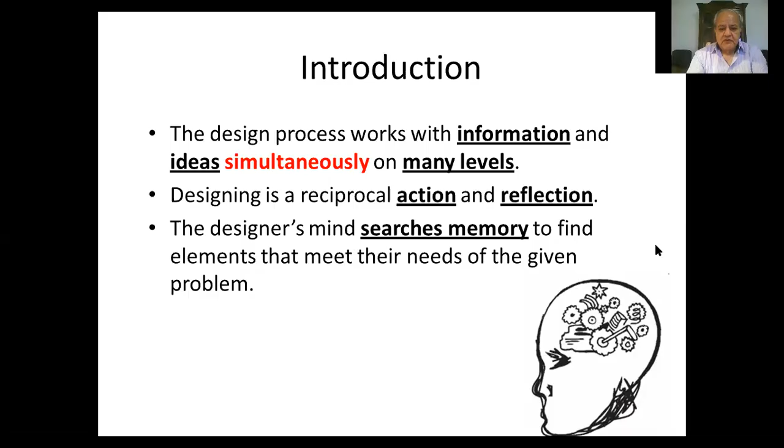So while we are working on the conceptual stage, it's like a puzzle. We never know what the building will look like or the idea will look like at the end. It's pieces of a puzzle that we try to put together and try to find what brings them all together in a meaningful way. How do they fit together? What are the missing pieces?

Do we have missing information about the site? We have missing information about the program. We have missing information about the client. If there are missing pieces, you will never get the full picture as you like to have at the end. As I said, we go through different stages of design, and during the stage of the synthesis, this is where

ideas are formulated. So the first thing is that we collect information about the site, the program, the data, examples, and then we go to analysis stage where we analyze this information and find out what will impact the project most and identify what are the objectives that we want to achieve. And then the synthesis stage, where all this information comes together in the form of the concept.

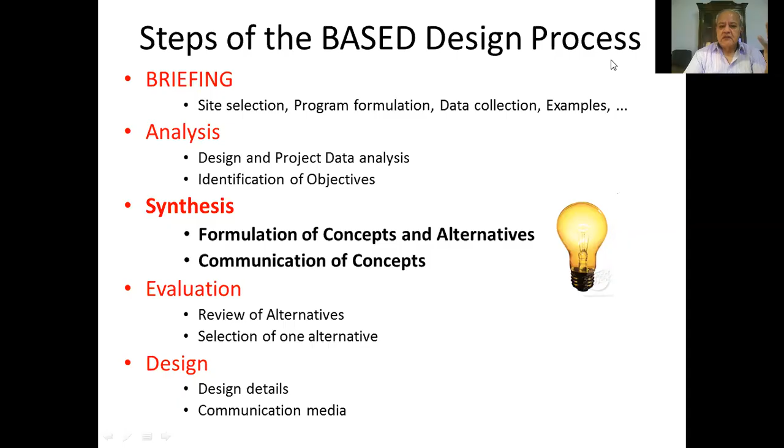But the key element in our work is synthesis. If we take the first letters of each of these stages, we'll find that they create the word BASED. So we can think about this as a BASED design process. BASED: briefing, analysis, synthesis, evaluation, and design.

So the BASED design method that we talk about starts with a briefing of collecting information about everything, and analysis, synthesis, evaluation. As we said before, we analyze the program, the site, the goals, the alternatives, and then we go to the synthesis stage, where we develop solutions and concept, form, and space, and provide that in a preliminary or schematic design. You can use models, of course, to illustrate your ideas. You can use some renderings and so forth.

And evaluation of these concepts to achieve the design. So analysis, synthesis, evaluation. If successful, you go to design. If not successful and none of the alternatives satisfies the client and the users and the needs, then you go back to the analysis stage. What is missing? What do we need to do more, and how to improve our base knowledge so that the synthesis is better and complete.

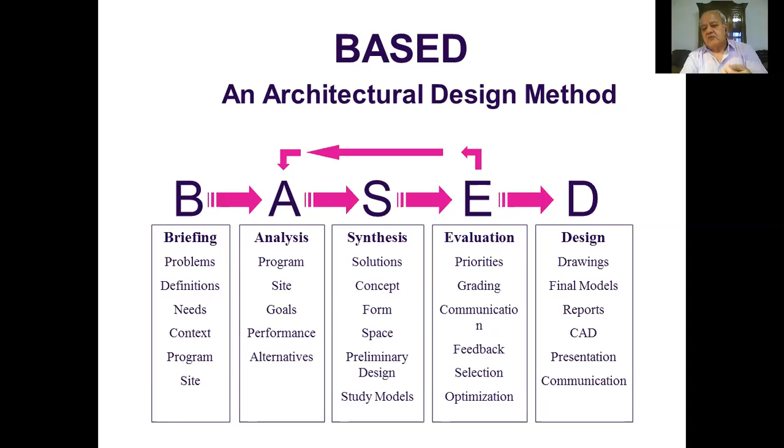So it's not a one-shot process. It's, as we said, action and reflection, until we reach a satisfying concept. Then we proceed to the design stage.

Concepts can come from different sources, unlimited. They can come from ideas of balance, if you are designing a courthouse, for example, or a governmental building or something. So the ideas of balance are represented in symmetry, nature, tools, ratios, level, justice, and can be a source of ideas for your concept. If you want to illustrate grace, maybe you look for how the dancing happens, flight, skills,

fluidity, focus, effort. If you are looking for complexity, you can look at integrated circuits of a computer chip. You can look at politics, ecosystems, planetary movements, fractals, music. If you are trying to illustrate knowledge: through learning, experience, crafts, skills, communication, memory, mastery.

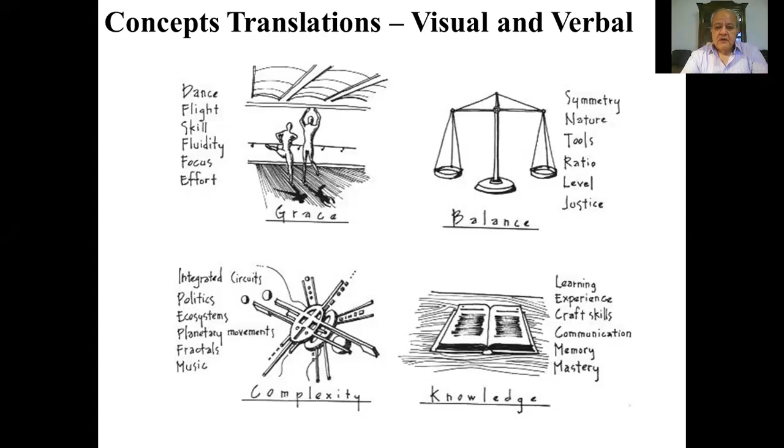So ideas can come from unlimited sources. And of course they must be related to your client interests, your site, your ambitions, dreams that you are translating for the client. So the ideas can be intangible, can be something that is very conceptual, very highly conceptual, as we said, ideas, human conditions. They can be tangible, coming from a certain object, and they can be combined and coming from different sources.

Can you hear me? Yes, doctor. I lost you for a second, but you're back now. Buffered, but it's working. Yes, yes. There was a phone call, so it interrupted the speech.

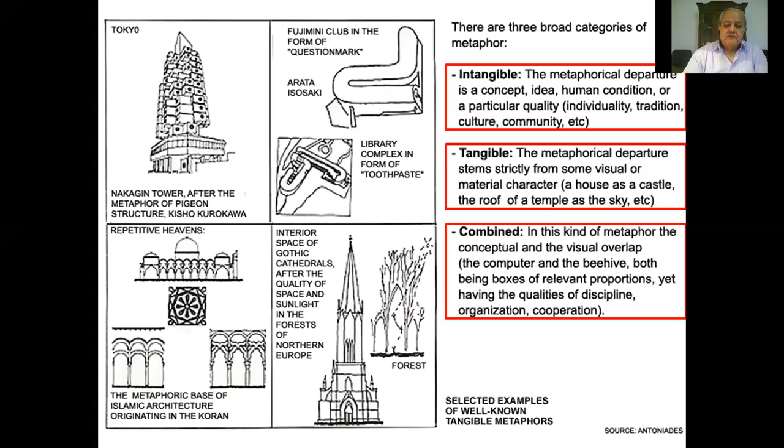So as we said, the ideas can be coming from a very intangible level, and they can be coming from very tangible, like imitating a certain shape or form or whatever, or a combination between the two. So you have to open your mind to everything. Try to find ideas from as many sources as you can, and sketching.

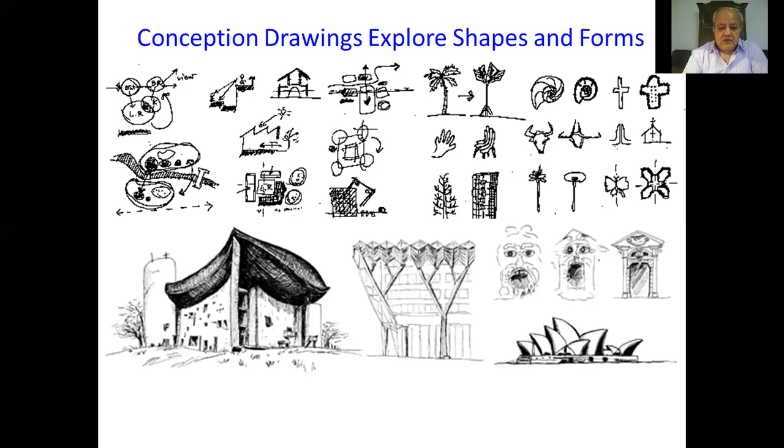The success of concept creation is sketching. If you have good sketching skills, this is very valuable at this stage, to keep sketching your ideas. Most successful projects were coming from sketches. Also, having a mood board is important. Collect some pictures, images, materials, so that you can provide this as inspiration for your client.

As we discussed yesterday, the site can be the main source of your concept, depending on the topography, climatic condition, geography, demographic conditions, geology, and many elements that can be the main source of the concept. So your investment of time in the site analysis and site survey and information collection is very critical. Your idea might come only from the site, to relate it to a certain cultural background or buildings around you or whatever.

So you have to weigh each determinant and see what is the strongest. Is it the site? Is it the program? Is it a philosophical idea? Is it an intention? Is it the artist's work, him or herself? So there are many sources. So the site itself, the site conditions, the topography can be a very important determinant in creating the concept.

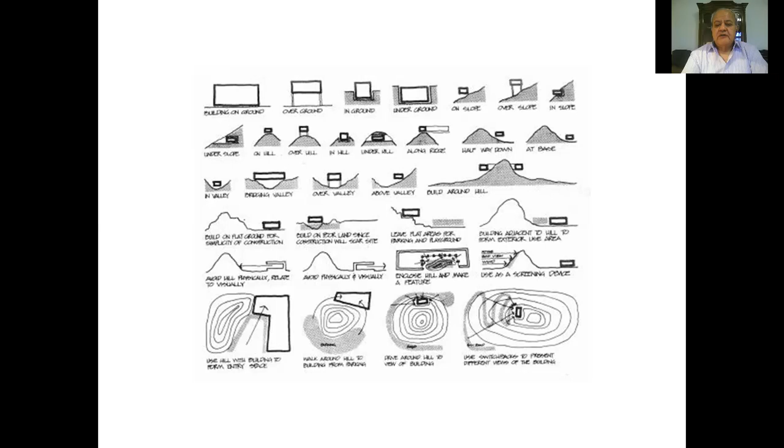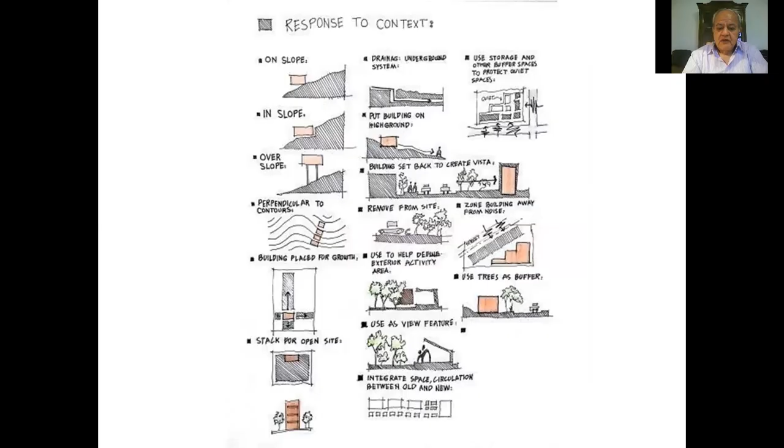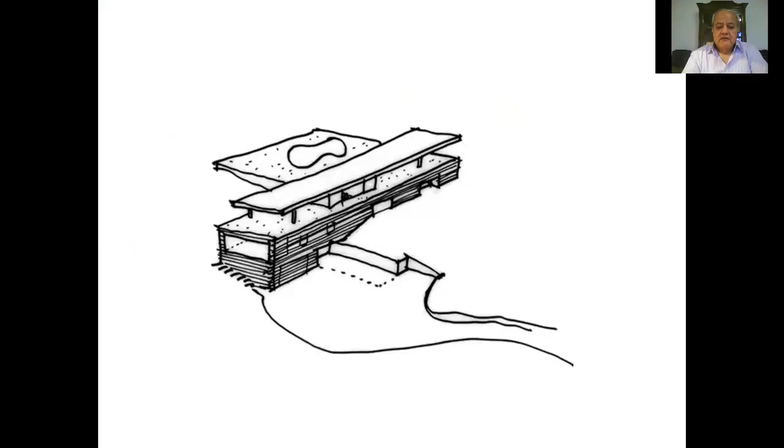How do you respond to the site conditions, the contour lines? Are you going to build on the slope, in the slope, inside the slope, or over the slope? Do you have vegetation around? How are you going to deal with that? So the site itself and its conditions can be the main source of the main concept generation. So your integration with the site: if you have excellent views around, maybe you need to have your project open to the nature around you and integrated with the topographic conditions.

So the influences on the design can come from different sources. And you have to treat each project separately. Every project situation is different, has different requirements, different limitations based on the client, the budget, the program, the cultural, environmental, technological, aesthetic context. Every project must be treated individually, not copied from other projects. So you have different challenges and opportunities.

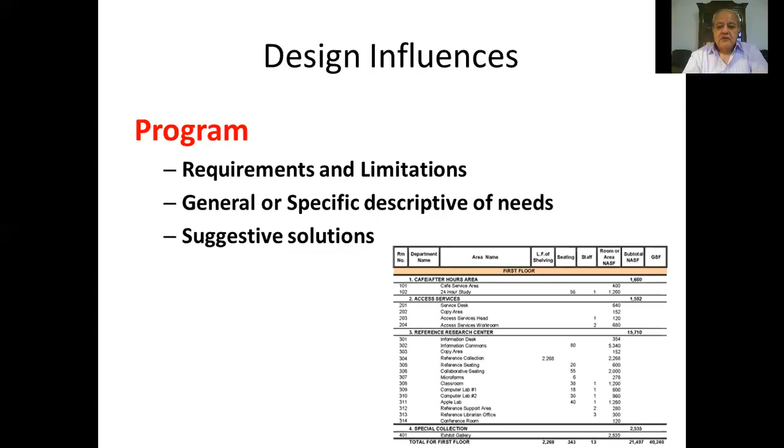The program can be a very important influence on the design. What are the requirements, the limitations, the areas? Do you need long span structures? Do you need high-rise structures? They can provide you with solutions directly from the program requirement. If there is a strong community around the project with specific requirements, you need to have meetings with the community itself. Community leaders, focus groups can provide you with important information and activities.

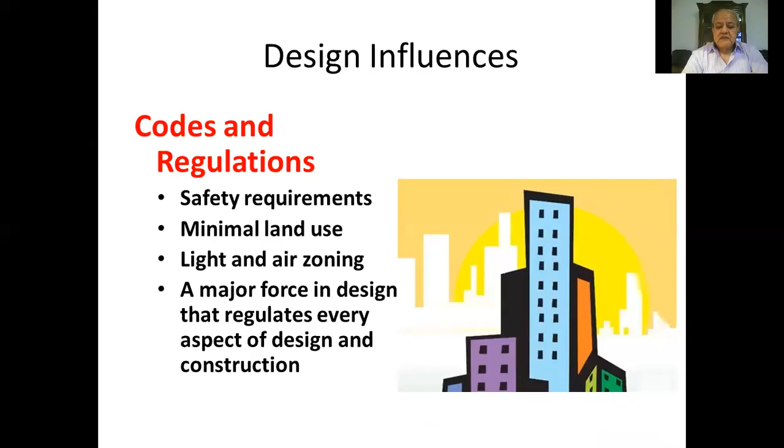Codes and regulations, of course, have major influence on the design. What is the allowed area for construction? How many floors? Setbacks? FAR, how many square meters can I build on this site? Parking requirements. All these will have major influence on the design.

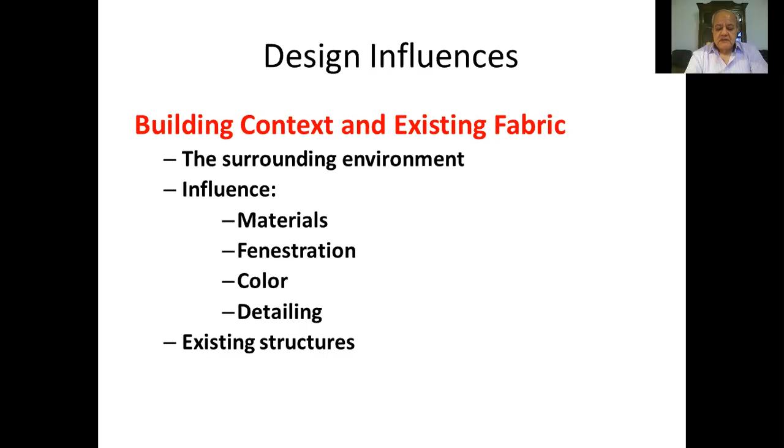Where is the building located? You need to understand what is the existing fabric around the building. What kind of buildings? Traditional, modern. How do you relate to them? Are you going to integrate with them so you do something similar, or make something different? And why? You always have to think about why do you want to do this. So this will have influence on your selection of materials, fenestration, color, details, and so forth. So you have to understand the context.

As I said, site and climate are important considerations. The site has its physical characteristics, and the climate: wind direction, solar orientation, temperature, humidity, precipitation, and how do you deal with these climatic conditions? Do you have snow? Do you have rain? Do you have sand?

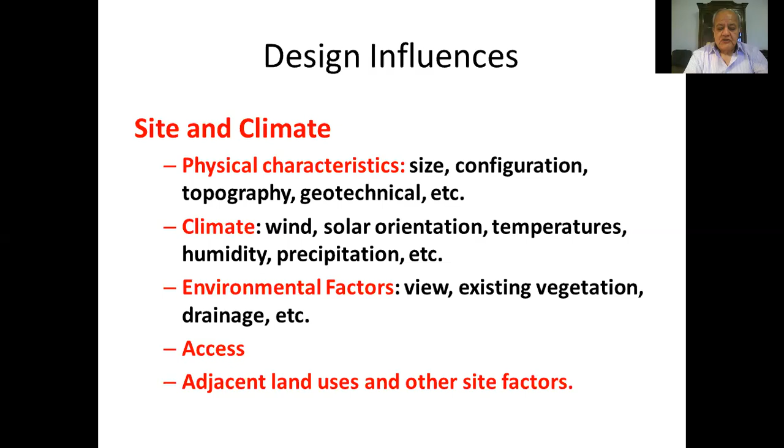The second item are the environmental factors. What are the views around you? Which direction? Do you have existing buildings or existing vegetation? How do you reach the site? What is the access to the site? Adjacent land uses. Many items coming from the site.

Building technology is also a critical factor, because now buildings are not only walls, floors, and ceilings. They are like small machines. We have air conditioning, we have lighting, we have internet, we have different systems that are impacting our building design from the beginning. And these are identified usually in the beginning of the project, in the briefing stage.

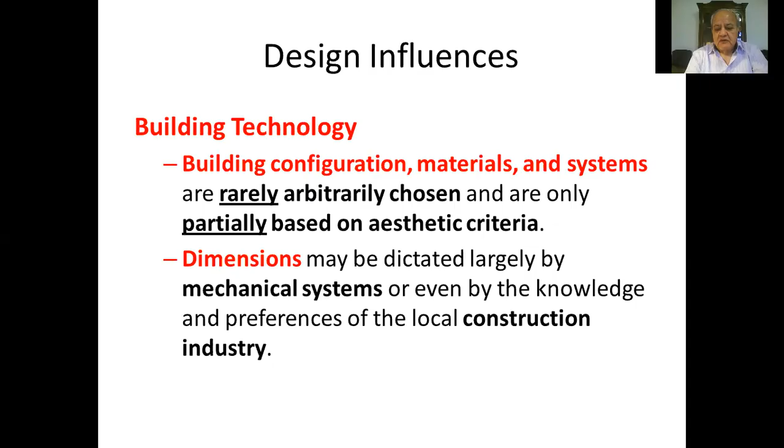The client might tell you about specific requirements. If you are designing a factory or a hospital or an airport, you have to consider all these building systems from the beginning of the project. Dimensions might be affected by the mechanical systems used, the construction systems required. Maybe the client wants to use prefabrication. Maybe the client wants to use standardized elements so that they reduce the cost. So you have to be careful about this.

Of course, the issues of sustainability, as we say, the 3 E's, environment, economy, and equity, are becoming major elements in the design now. And currently we can also add to it health, because health is becoming a major concern in any design, and that will impact the design industry in the future a lot. So you have to think about all these aspects of sustainability, and maybe the client will ask you to design the building from the beginning to achieve a certain sustainability grade, like platinum, gold, silver, or stars, or whatever. So you have to consider that from the beginning.

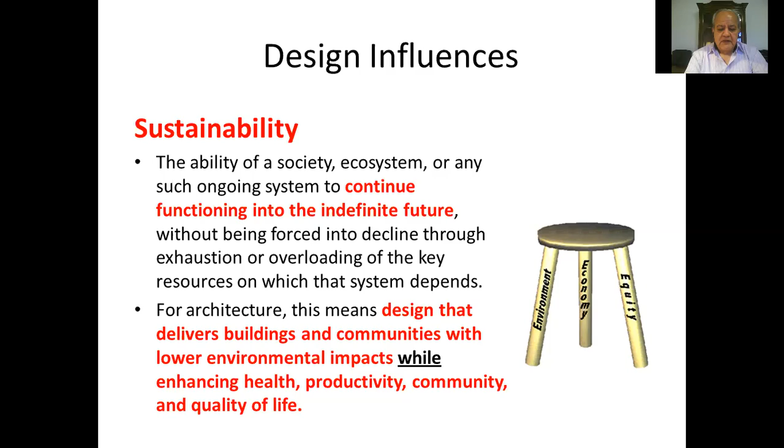Cost. Of course, in university, you don't think much about the cost. It's taken for granted, and you don't have to worry. But when you go to professional practice, you will find that cost comes sometimes the first item in the project. We have limited budget. Please reduce the cost. Don't make it cost too much. You will hear that a lot from your clients. So cost considerations are very important. You have to understand, does the client have a fixed budget or flexible, not open? No one has open budget. It's either fixed or flexible. So you can go up and down a little bit in the budget.

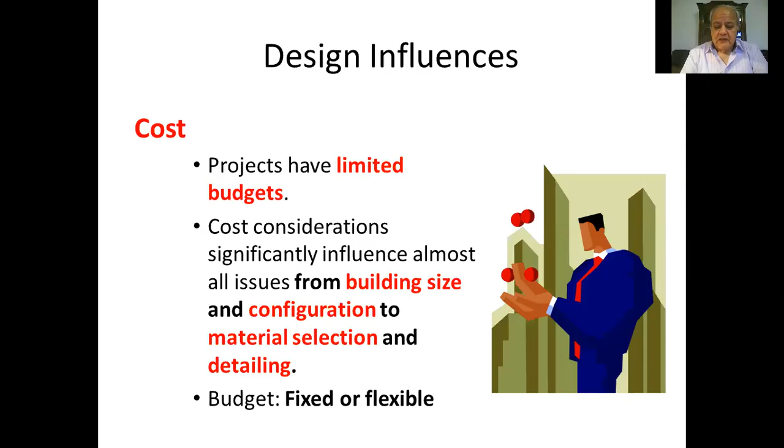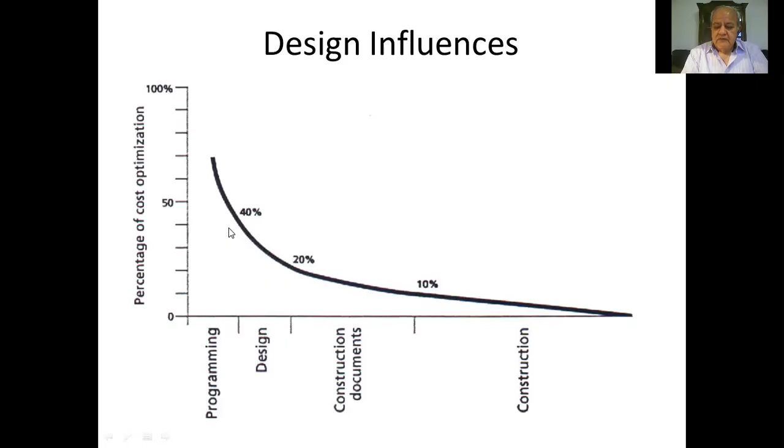Again, we want to stress that what you do in the beginning of the project impacts the cost a lot. You can optimize the cost of the project in the beginning during the programming and the design stage more than at the end in the construction stage. So make sure that you spend enough time here, and the client should understand that the time spent at this stage is to optimize, not reduce. Don't use the word reduce. Use the word optimize the cost. There is always a cost. And we don't want to associate cost reduction with quality reduction. No, we want to optimize. We want to use the resources and the cost in a meaningful way so that we achieve the best results.

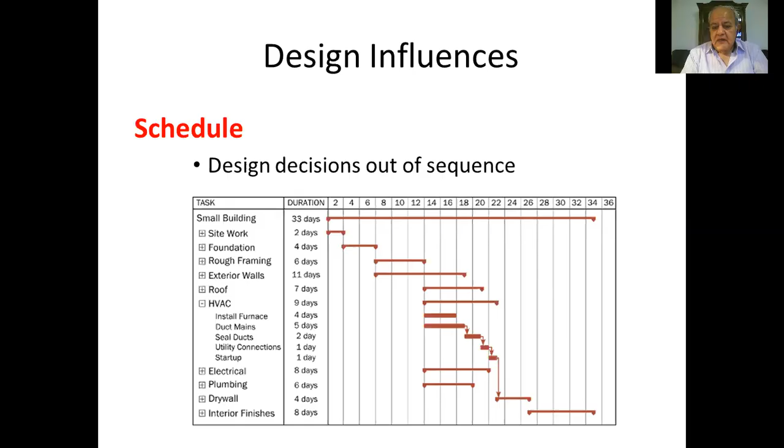Schedule. Sometimes you have a client who wants to build a school. So they want to start in a certain date, so that they furnish the school and start with the academic year. So you need to understand from the beginning, how will the schedule affect your design? When to start, what to do when, and so forth.

The client is always a major influence of the design. In professional practice, you always have to be communicating with the client. Don't disappear for 2 or 3 months and then come up with a good idea. It doesn't work. You have to be continuously meeting with the client during the design stage. Review your ideas. Make sure that you are on the right direction. Make sure that they understand the consequences of any design decision in terms of cost, in terms of time, in terms of complexity, and so forth.

There is no good client. Some clients might come to you with a program and budget and all the objectives of the project, and they want you to just design. Others, they have no idea what to do. They might have budget, but they don't know what to do with it. So you need to find site and program for them and objectives. So there are different types of clients, and you have to meet the client several times in the beginning to understand what is the nature of this client and how can you work together to achieve the best results.

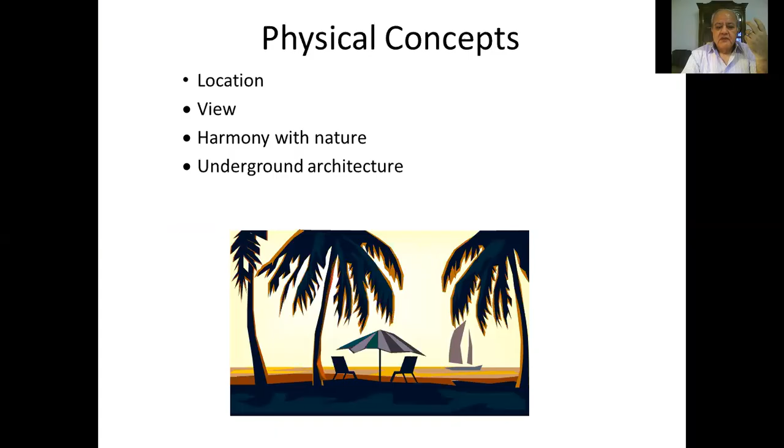How do we relate to the natural elements, to the views, to the architecture that is already there? Of course, there are many well-known sources of concepts from nature, from beehives, from seashells, from the sand dunes, from waves. All these are kinds of sources that are coming from nature. They can also be cultural. If you are designing in a historical site or traditional site, you have to consider all these elements.

Religious factors. If it's a religious building and has some significance, you need to think about the religious factors, the social factors, people who will be living in that area. Economic factors. What is the economic standard for the project? Is it a shopping center, high class or middle or low? How do you design for each one of them? Political factors. What kind of political statements need to be illustrated in the project?

Functional factors. You might have different functions. They have complex relationships, and you need to think about them. Spatial relationships also might be a source of the concept. What kind of spaces do you have? How do they relate to each other? How do you connect them together? Same level, or use different staircases and different elevations, different heights. Do you have the same height for all elements? Are they all 3 or 4 meters, or do you have areas that require 6 or 12 meters? So how do you bring them together?

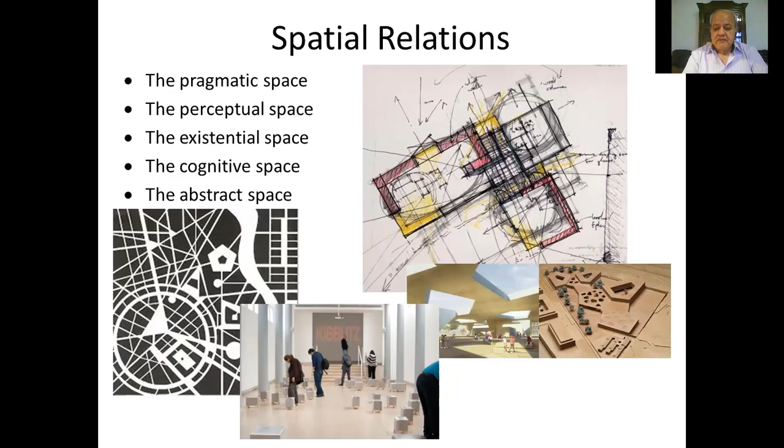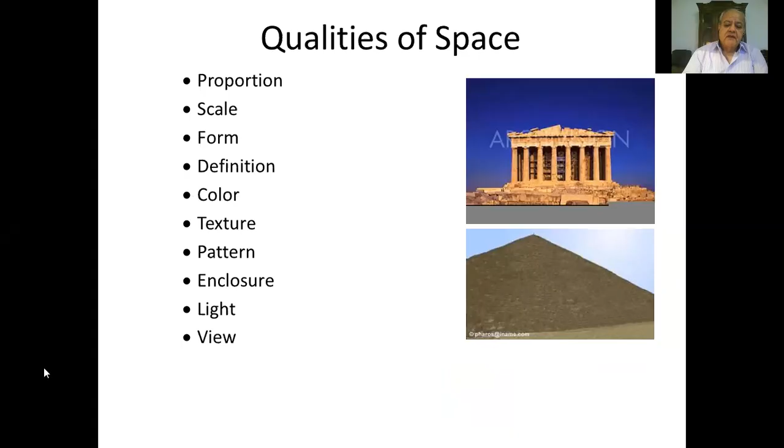We have different types of spaces. There is the pragmatic space, the physical space, there is the perceptual space. How will people perceive the space and walk through the different spaces? Existential space, cognitive space, abstract space. So all these are different ideas coming from the spatial arrangement. Of course, the space has qualities related to its proportion, width, length, and height, scale, big or small, form, definition of the space, the color, the texture. All these elements affect the quality of the space.

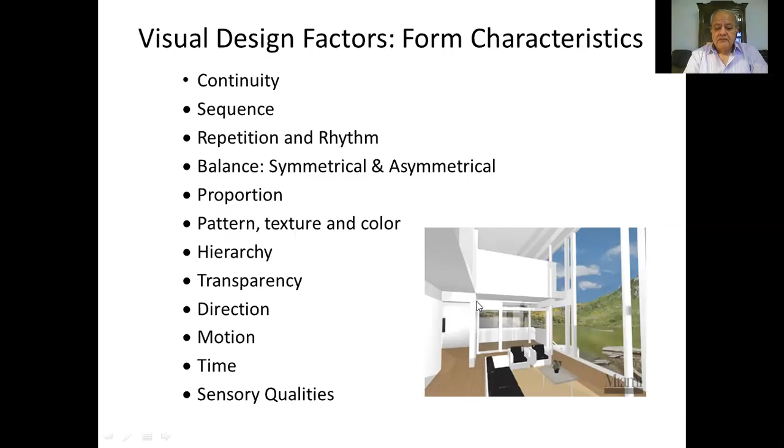The visual design factors. How do you put these spaces together? What is the sequence of the spaces? How do you provide continuity and fluidity between the spaces? Are they symmetrical, asymmetrical? Their proportion, are they all the same proportion or have different proportions? Pattern, texture, color of spaces, hierarchy, transparency, direction, motion, time, sensory qualities. All these are elements that affect the design.

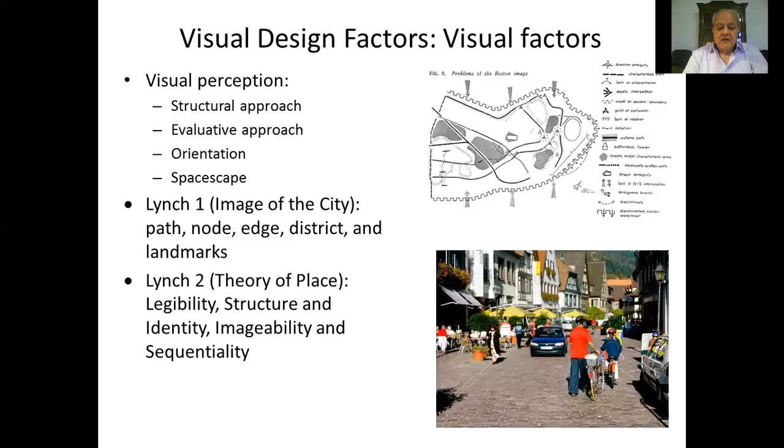We can also think about our visual perception. How do we perceive spaces? We have different theories of how we perceive spaces in the city, in the building, and in one room. There is the famous Kevin Lynch theory of the image of the city and theory of place, where he identified certain elements that allow us to understand or to perceive the spaces that we live in. You can also rely on visual design factors like Gestalt psychology, where you depend on how the mind reads spaces and reads text and reads drawings and paintings.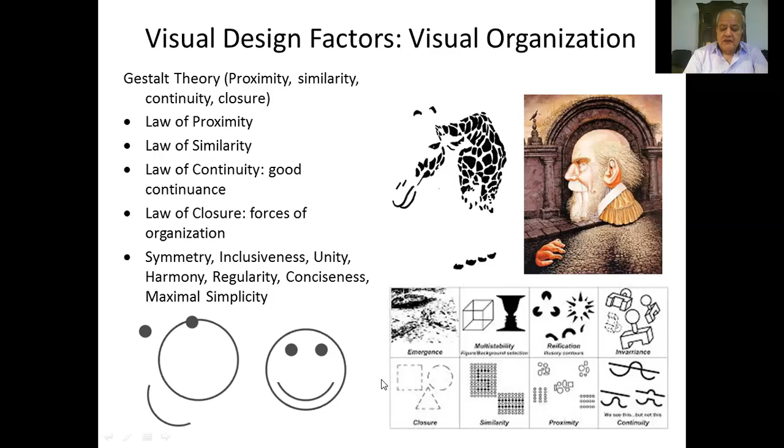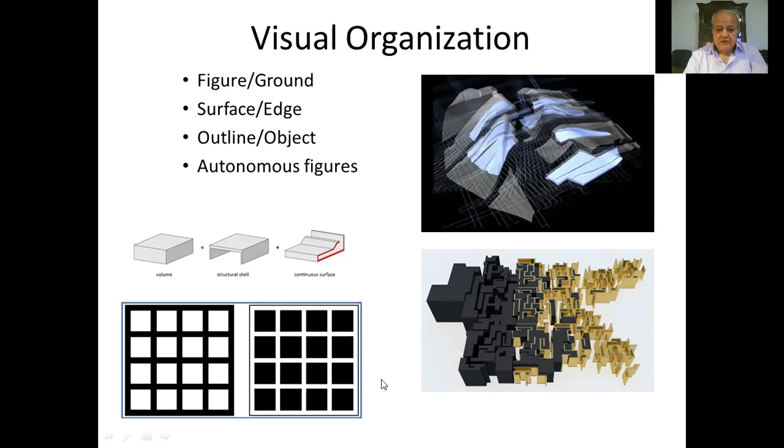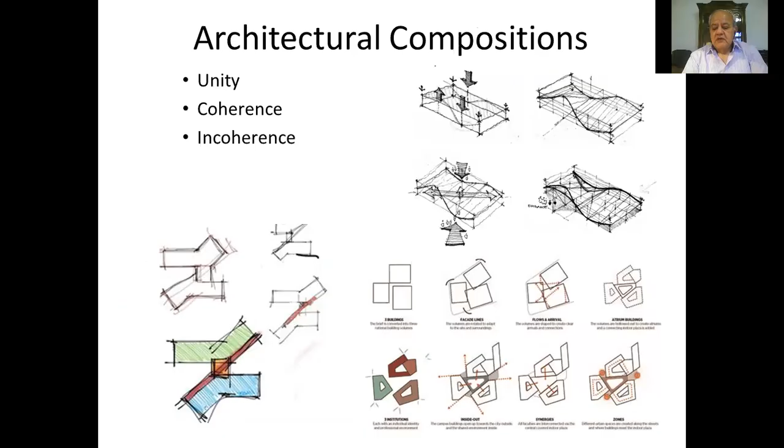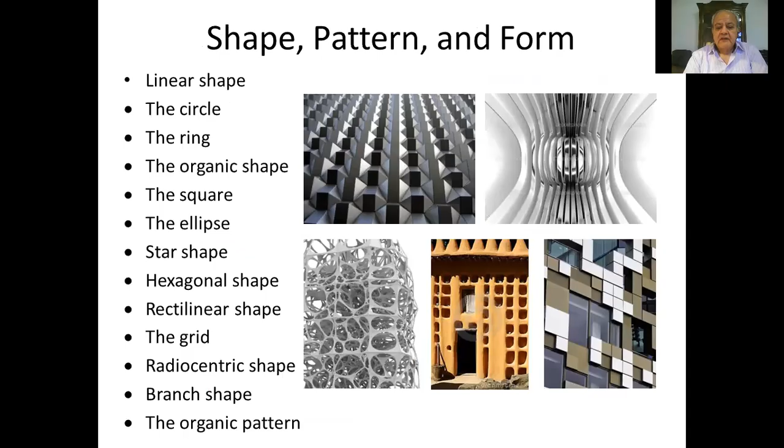The emojis that we use nowadays are also part of this. These elements, when they are arranged together, can create a meaningful symbol. Visual organizations: we all know the figure, ground, surface, edge, outline, object, things that relate the objects to themselves and to each other. We have architectural compositions. We can start from very pragmatic principles of architecture and start to manipulate the form to achieve what we want. We have linear shapes, circles, rings, squares, stars, hexagonal. All these are architectural principles that we can base our design on.

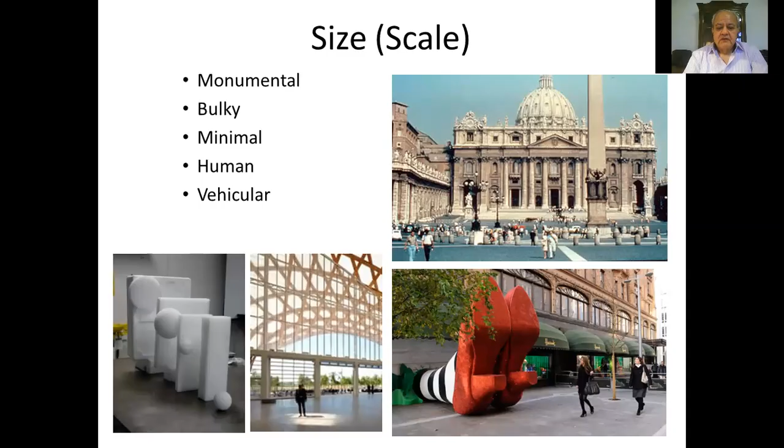The size: in the postmodern architecture era, we used to use the size and the scale as one of the elements of design. By changing the size that we are used to to something different, it creates a different experience. Color is extremely important. If you're working with an artist, a painter, the issue of color is important. How do you integrate it in the design? So you have to go back to your profile of the artist that you thought about or selected, and get inspiration from what they do in your concept and design.

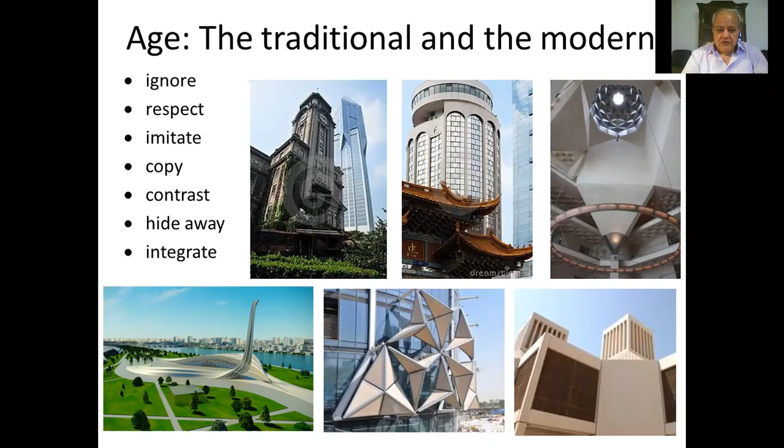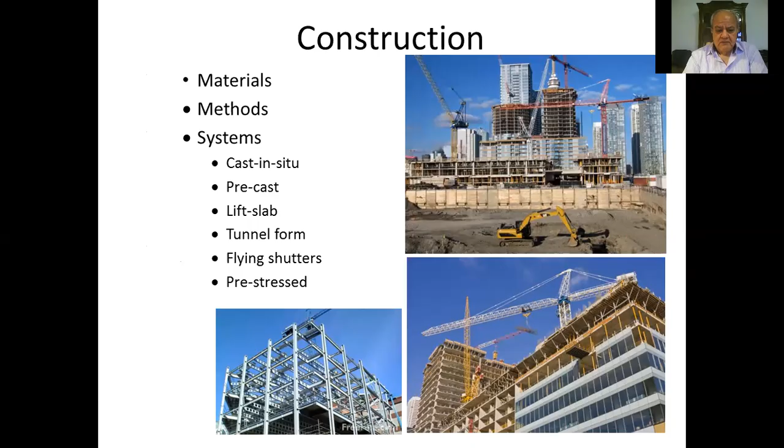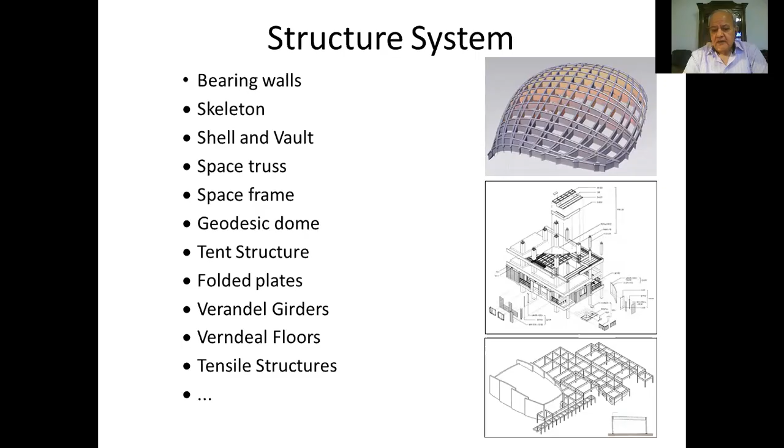We can have age as a concept generator. Are you using traditional or modern or a combination between the traditional and the modern, or contrasting the modern and the traditional? So this also can be a source of inspiration. Construction system can be a major element. You might depend on the construction system and focus on how it is used. If using tunnel form, lift slab, flying shutters, how does this construction system affect your design? Structural systems. Also, if you're using a special type of structural system, it will have a major impact on the concept. So we have to look at everything that might impact our design.

You may want to have some Arabic Islamic design inspirations from the courtyard, the alleyway, the plaza (al-saha), the casbah, the mashrabiya, all these elements that are coming from our Arabic and Islamic traditions.

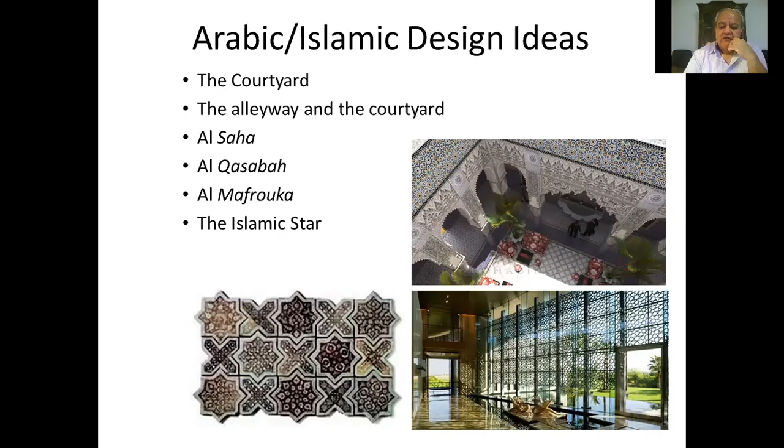Right, we will stop here because of the timing, and then we will start again after 5 minutes, inshallah. Okay, are you all there? Yeah, we are. Okay. 5 minutes break, and we'll start at 11:30, inshallah. Okay.